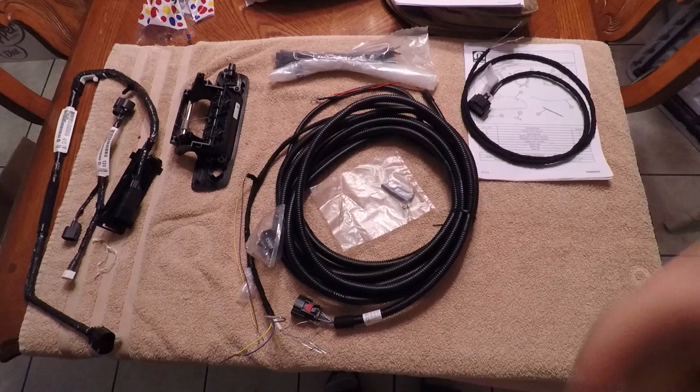So, ladies and gentlemen, what do I have for you today? Well, today we're going to attempt to install the OEM backup camera on my wife's 2014 Ram pickup truck. Back then they didn't come standard with them like they do after the feds changed the laws in '16, I think. Now everything is mandated to have one.

And I've never really needed it. I've backed into a few things, but nothing terrible. But what I have noticed on my big Dodge that I tow with now, the '17, is it is really nice when you have to back up to a trailer. And you've got that camera there. You can line it right up in one shot by yourself. You don't need help. You don't need to get out, in and out, in and out.

And especially now with this new ZF 8-speed where they redid the transmission programming where you can't back up or move forward with the bloody door open if you have your seatbelt off going slow. Stupid. But anyway, I digress.

So what do we have? This is the factory kit.

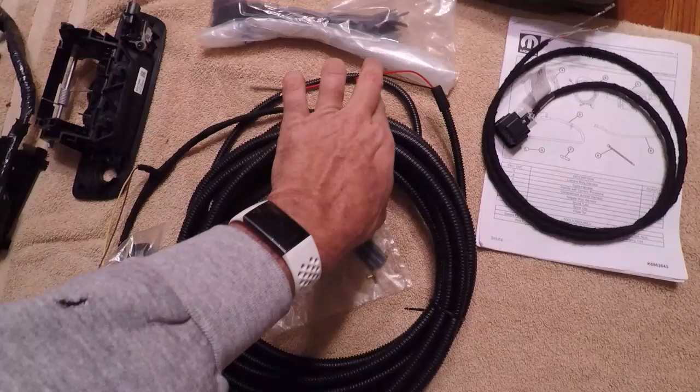Connects to a power wire underneath one of the main fuse boxes, which is going to require some soldering, which is what all this little stuff is for. That ought to be entertaining. Then this sneaks through the firewall. This gets connected into the body control module.

This connector gets assembled, which then connects to this connector, which then goes over to the back of the radio and connects to the video source, also in one of the Deutsch connectors, I guess, if these are actually considered Deutsch connectors and not Molex. I don't know. But this ought to be entertaining.

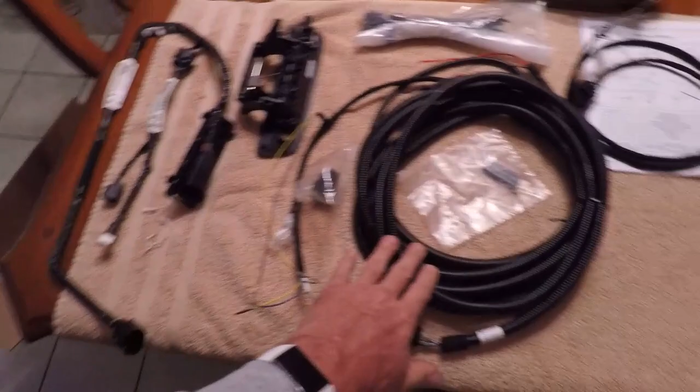Mechanically, getting the tailgate set up is going to be simple. That's a couple of bolts, nuts, screws, things like that. We'll run through that. That'll be pretty easy. Running this up to the front, that's probably not going to be that hard.

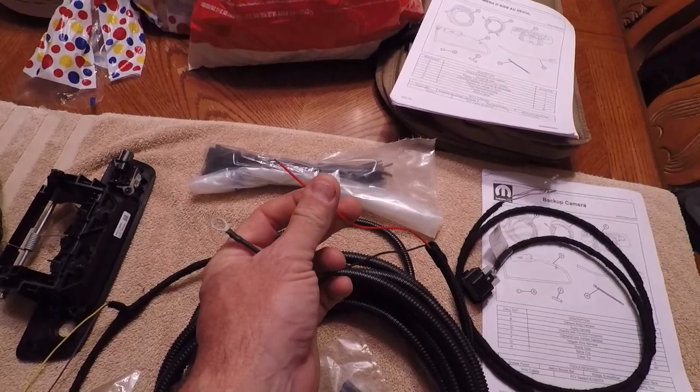When we get into the steps where we've got to partially strip a pink wire coming out of one of the fuse panels and then solder this to it without breaking that other wire, now we're getting into some higher level stuff that's kind of on the outside of my comfort level, but we're going to try it. And the rest of this stuff, not too hard.

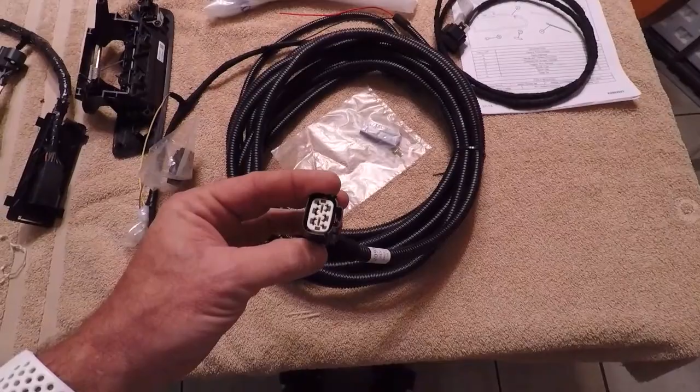The worst parts is generally trying to unpin some of these connectors, and there is a little bit of that we're going to have to do, and I'm going to show you how I believe they're supposed to come apart without breaking them. I think I may only have to do one of those. There's a couple others that talk about it in the instructions, which did come in English, French, and Spanish, so that's kind of nice.

There's a couple other connectors that could possibly have to be de-pinned before I can put new pins in them, but given that this truck is fairly old and was never optioned with this or anything else, I don't know that it's necessarily going to need that to be done. So that's what we're going to do today. First thing we're going to do is move this junk outside and start taking the tailgate apart.

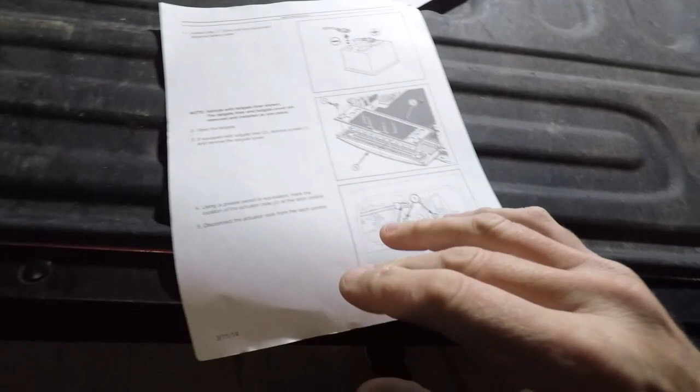Alright, well, supposedly we don't need too many tools other than metric sockets, a Phillips screwdriver, trim stick, wire cutters, RTV sealant, and the crimping tool, which of course I don't have, but we'll make do. One of the first things you need to do in ye olde instructions, it says take the negative battery cable off. We'll do that in a bit.

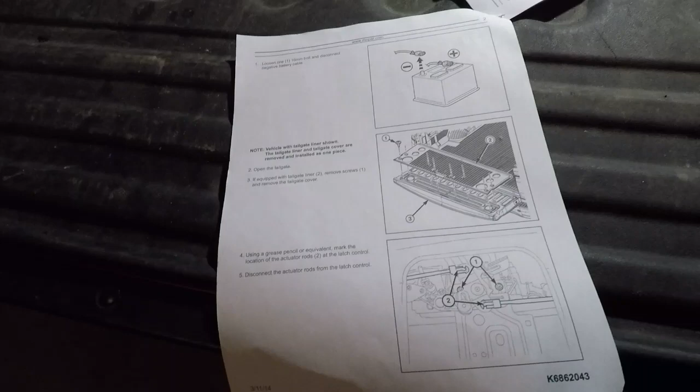But we've got to get to the inside of the tailgate. Underneath this bedliner, or tailgate protector, which for this truck I put a WeatherTech on it, so that's what this is. Yours may differ. Is a panel along the whole top of here where all the wires and connections and things live for the new, well, and existing latch.

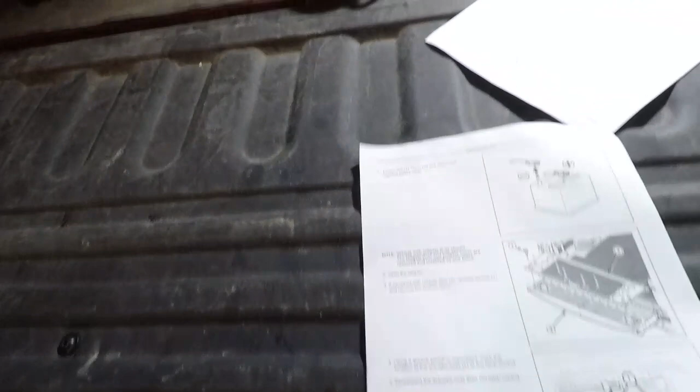So that's the first thing we're going to do. I'm not going to show some of these steps, which are going to be pretty obvious. The tailgate protector on this one comes off. You've got some screws here and a little bit of Velcro up front, and then that'll pop off, and then there's some more screws here, here, here, and here, and then that panel comes up. So that's where we're going to start. That's what we're going to do, and then we're going to start the action inside the tailgate.

Okay, once you pull all of the screws off, then this panel should just move out of the way. And it does. And I don't know why these grommets stuck on that one. I guess just because they felt like it. All the rest of them came off, so don't lose those if they do stick.

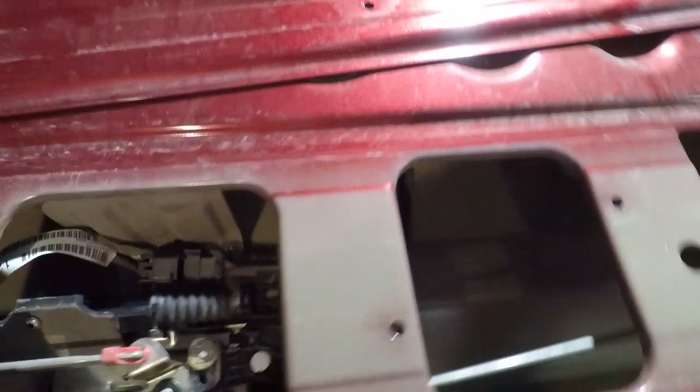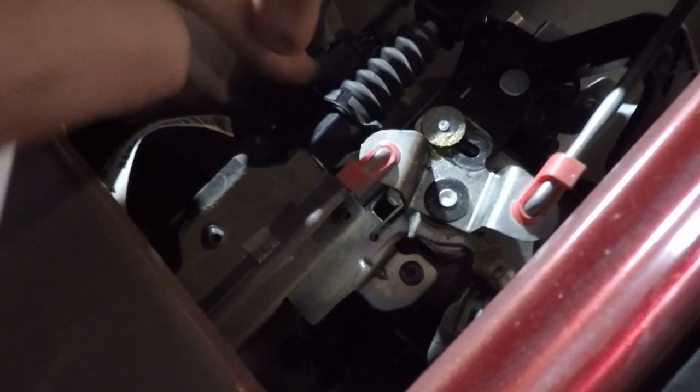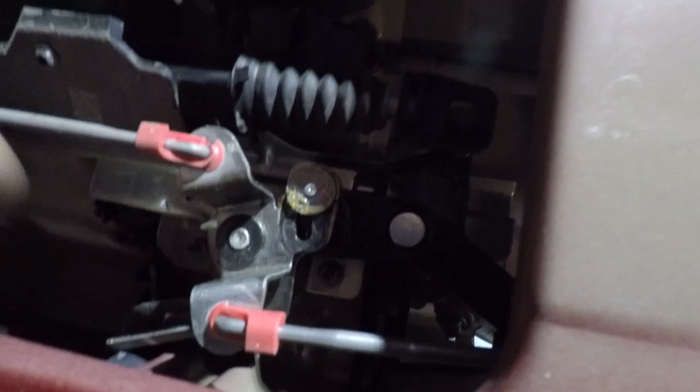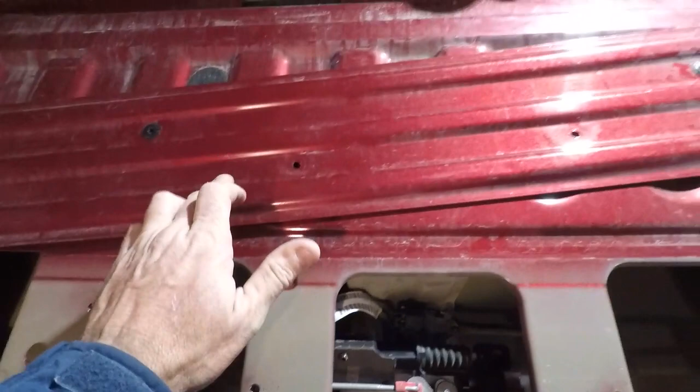So now we're getting into the nitty-gritty here of what we've got going on. You've got some of the harnesses you're going to have to change. See the similar bends. And this harness that's going to go in there on the new latch. Apparently the mechanism isn't going to move. Now, that's interesting. So that's a good thing, I guess. All that mechanism is going to kind of stay where it's supposed to be. So we are going to set this aside and get set up and see what we can do.

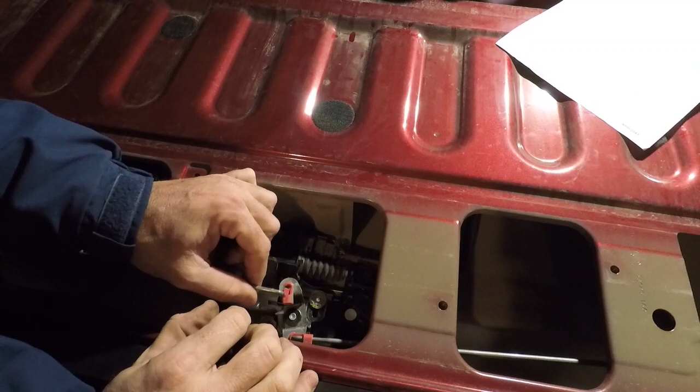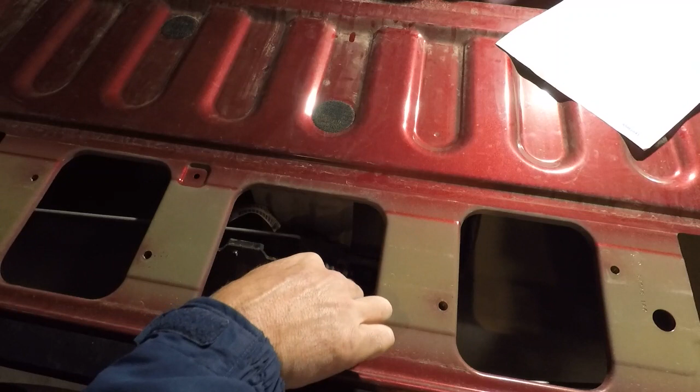Okay, so the first thing it says to do is mark these control rods and then disconnect them. Well, I've got this on video, so I'm not going to mark them, but I guess it's because you want the driver's side on the bottom and the passenger side on the top. These connectors are pretty common in this kind of thing. You usually just have to spin that out of the way, and then it disconnects. Same thing over here, spin it out of the way, and it pops off. And now these shouldn't come out. You should just leave them, because obviously that's going to go back in.

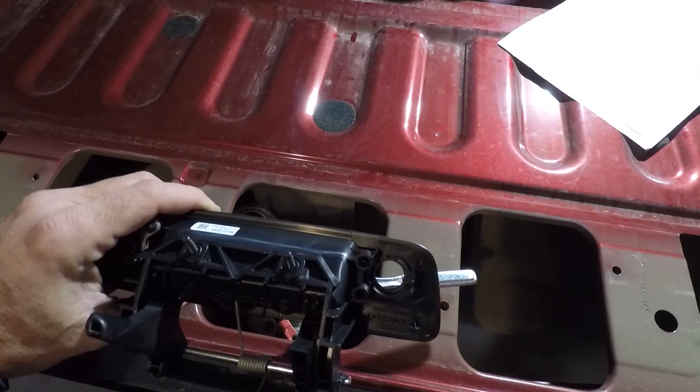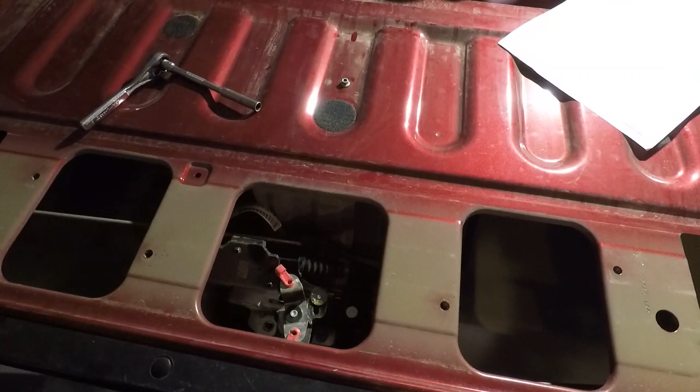So the next step is going to be getting down in here, and there's a couple of small, look to be maybe 8mm nuts we're going to have to take off, which is going to let the whole thing completely fall apart. So I'm going to go get a little wrench and see what we can do. So what you've got is this old one is in here underneath from the back like this. Got these two studs here, and they are little 8mm nuts that are on them. And because of my big fat hands, not the easiest things in the world to get a hold of. Found it.

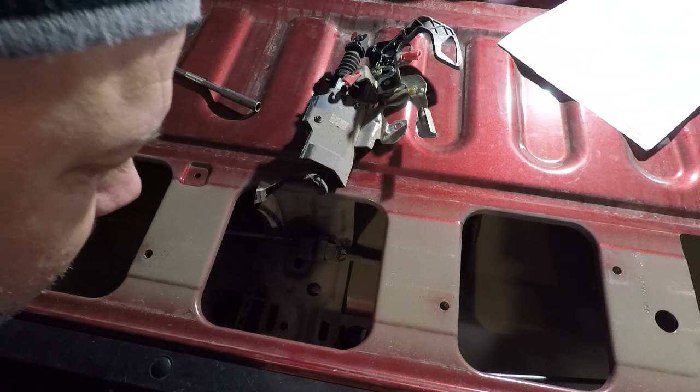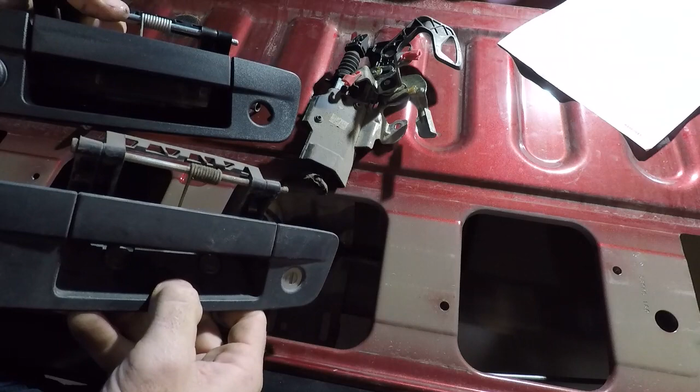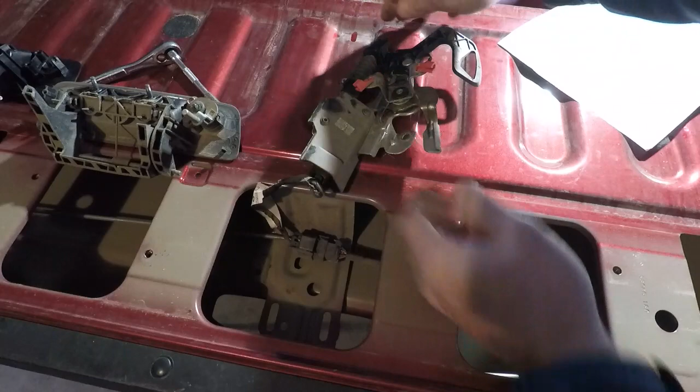And the next step is to remove this, and there it goes. So now we have the old one out and the new one about ready to start the reassembly. There really isn't much to this. All that does, when you pull up on the handle, this lever pushes on this lever, pulls those two rods that we disconnected, and unhooks the sides. So that's it. So now we're going to figure out what the next step is.

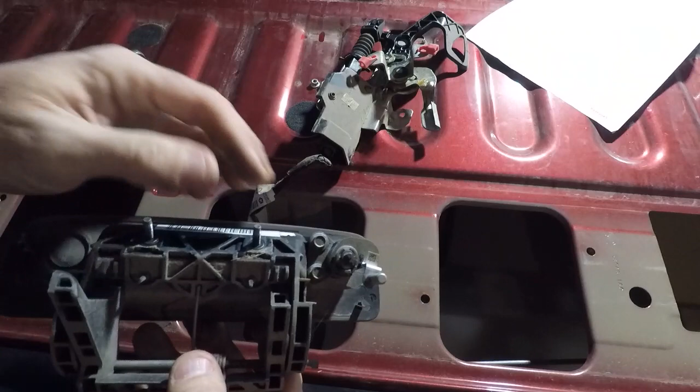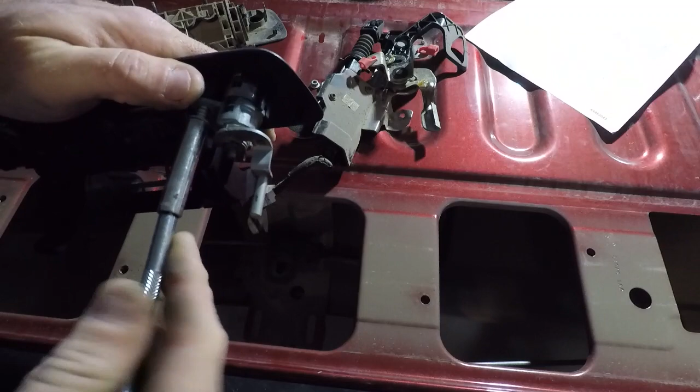So the next step is to transfer the lock cylinder over to the new unit, which is also 8mm. Interesting. The screws are self-tappers, so there are no threads in these holes to start, which is, I guess, to be expected. It's just a casting. And you want to be careful not to over tighten them, I would guess. Snap.

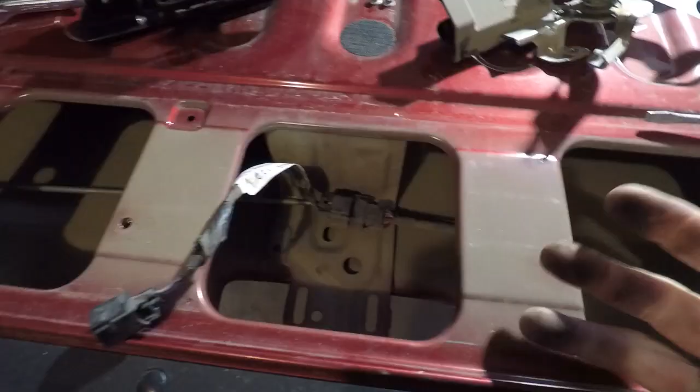Lock cylinder is transferred, and we got our new unit with the camera. So we're basically done with this. So it's at this point that the actual instructions skip a couple of steps. We have a new connector for here, and an entirely new harness that starts here and goes down to in here, comes out over there. You can see it actually has the same clips on it.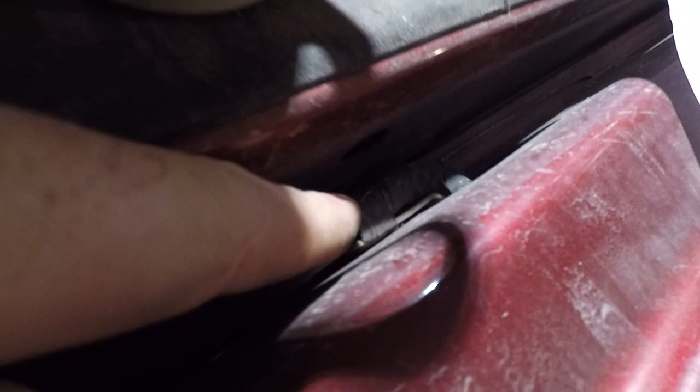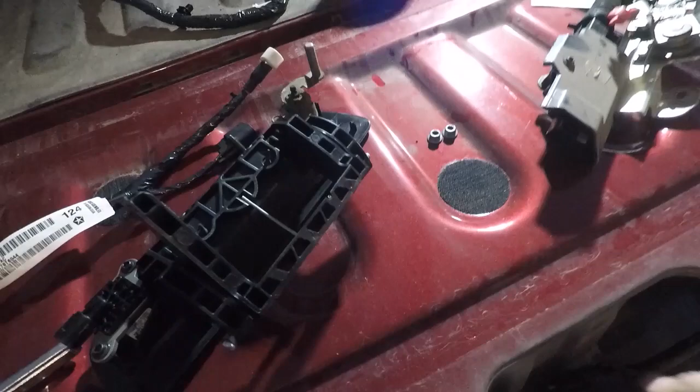And so this is underneath this. So if we don't go in there right now and kind of get that out of the way and get everything plugged in, then it's going to get difficult to make this work. So I'm going to go get my trim sticks with a Christmas tree remover and see if we can get this out of here without bending anything. It goes, but that's not what I wanted to do. That's okay.

Done. So that part of the harness is disconnected. Let's see if it's... And it is loose all the way down to the back side over there. So that's good. The next one is going to be... see if we can pry this out of here. Nope. There it goes. Got that one disconnected. Got another one here.

This one's interesting because this wire has been pinched in the gap for the tailgate for a long time, and I don't know that that's supposed to be like that, but all these connectors are now loose. So now we need to pop this one. I'm sure this one's big. There's a little tab you have to push to be able to pull this one out, and then there, it's free.

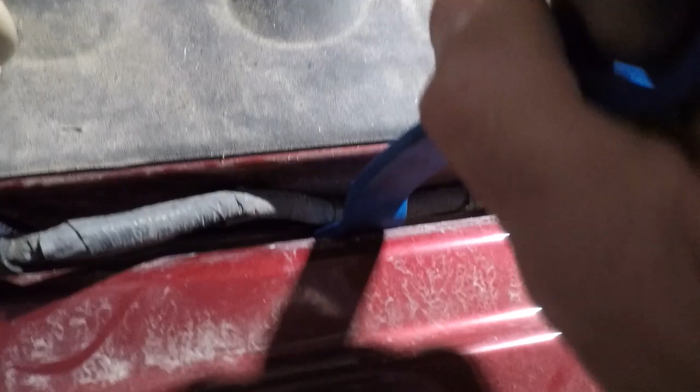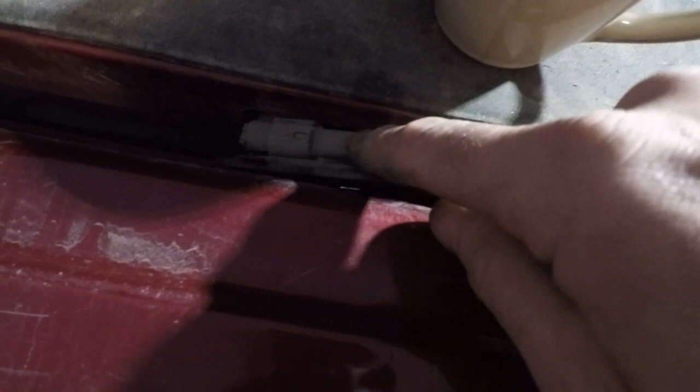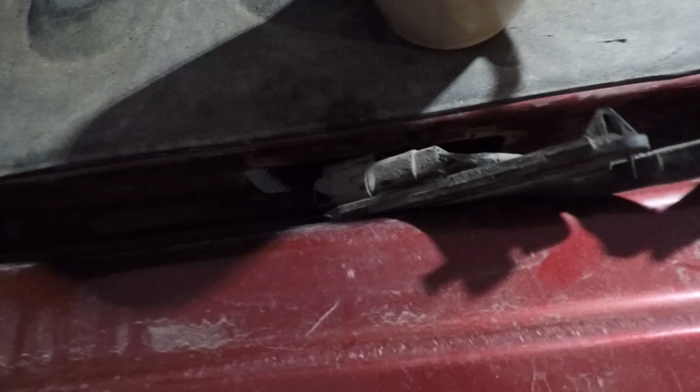So now what we're going to have to do is disconnect the body harness from this truck from this, so then we can get it out. As you can see, that piece is here on the new harness. Can't quite tell how to get that. So we're going to take a better look at it and see what we can do.

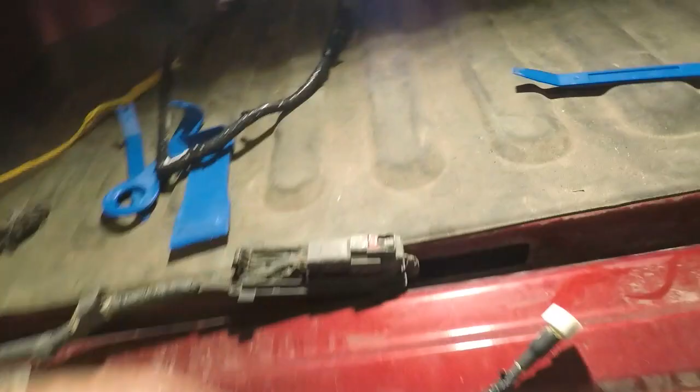And once you pull the whole harness out, it is a fairly standard double lock connector. So you got to move the red one up, and then you should be able to pinch it and pull it off, just like that. And now your old harness is done. Now here comes part of the fun part of this kit.

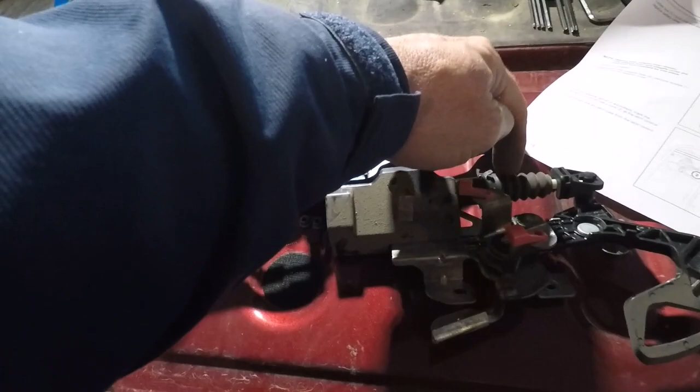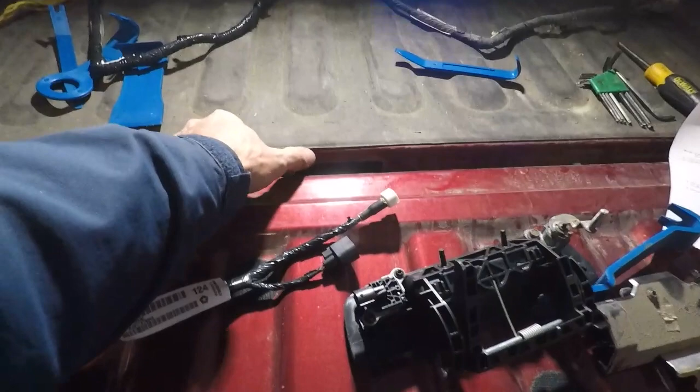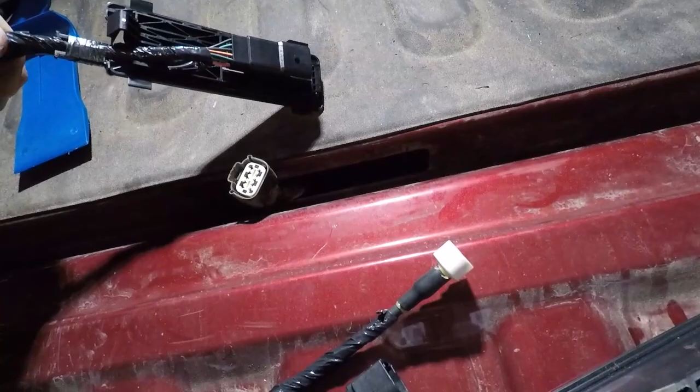So these two wires are related to the power tailgate lock. They run this solenoid. And those are not in the new body harness on this kit. So you actually end up having to pull these two pins out of this connector and repin them into one of the other connectors, so that when you plug the body harness with all of the camera stuff in it into this plug, you transfer over these wires from the car right now that actually run the power tailgate lock.

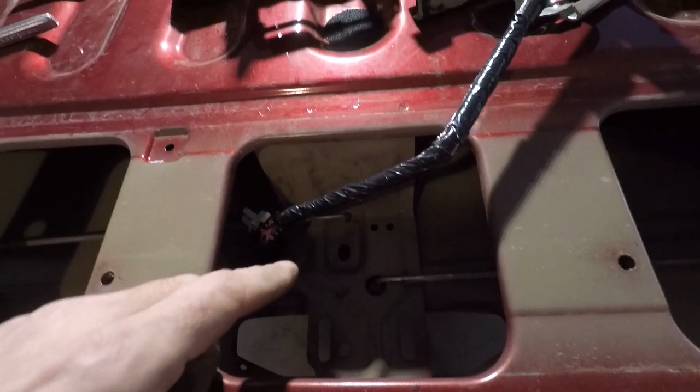So I think I know how to get those out without damaging them, but we're going to try in a little bit. The next step is to basically put the tailgate back together, drop the new wiring harness in, get everything plugged in, hooked up. Notice it has both of those connectors that go into the tailgate. And then we're going to get this all the way over to here, attach the new wire to that, put these two things back in, and then plug everything back in.

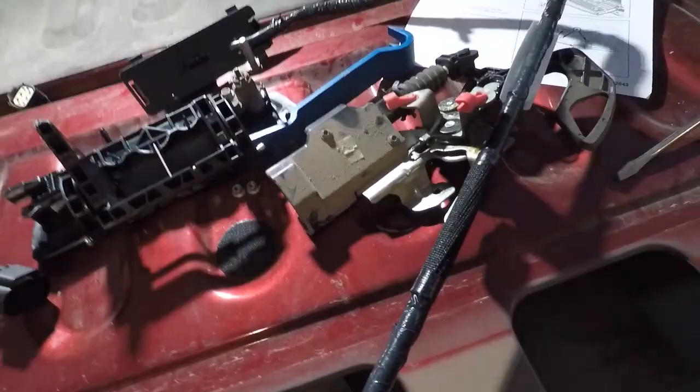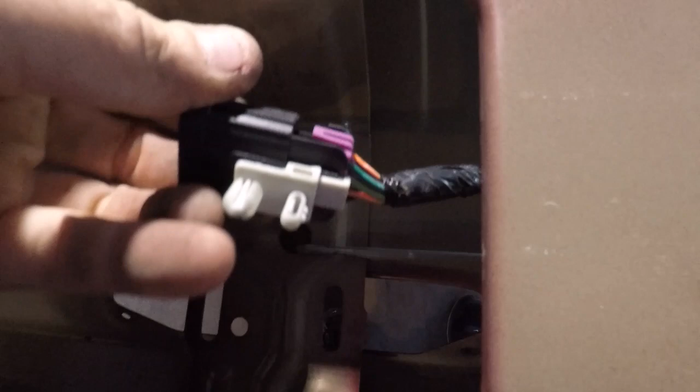So we're going to put the harness in first. The harness came out from the bottom, so I'm going to try to put it back in from the bottom as well. So this is the path that the harness has to take. It's not too bad to pull it in there. It takes a little bit of fiddling, but then you end up with, over here, this connector goes right there.

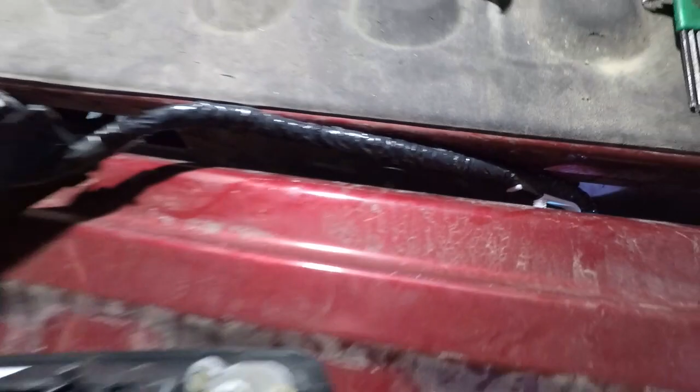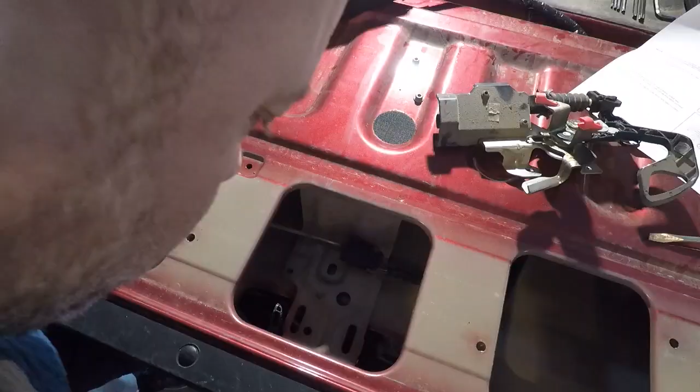Now I have not hooked up the outside connectors yet, which will finish holding this in place, because I want to make sure I have plenty of room when I have to unpin this connector and do everything else. So I'm not going to try to put all this in yet. I'm just going to let it flop for now. So now we're going to reassemble the new camera latch and the lock mechanism. There she goes.

As you can see, the way that goes in there, it kind of covers up. It doesn't cover up that connector too bad, so still not too bad. And make sure that your rods are not blocked by anything, because they have to go back on. So once you get that, then these go back in the same way they came out.

Okay, that works. The lock mechanism is lined up. Now we need to hook in the wires. And they come in from this side a little bit. A little bit easier to get this one if that rod is disconnected. It's also rather hard to see the orientation that this needs to be in. Oh, let me show you something there.

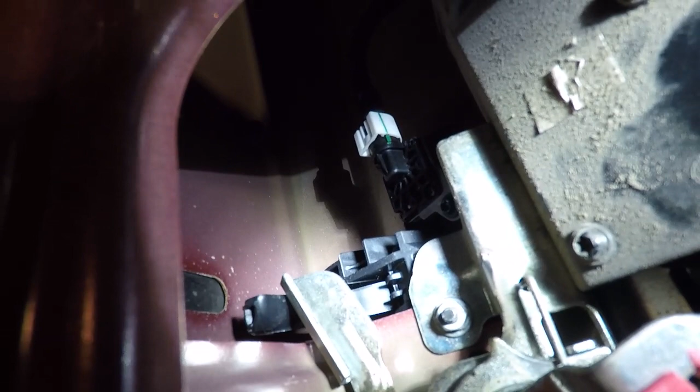You can see the little green lines? Those lined up, and that's the orientation it's supposed to be in. I didn't realize they were set up like that, so that's kind of cool. Just a quick little note on the camera plug.

And now the other one. Reseat this. And the easy part is done. Now we have a camera. We still have our lock. Everything is where it's supposed to be, held down as it's intended to be.

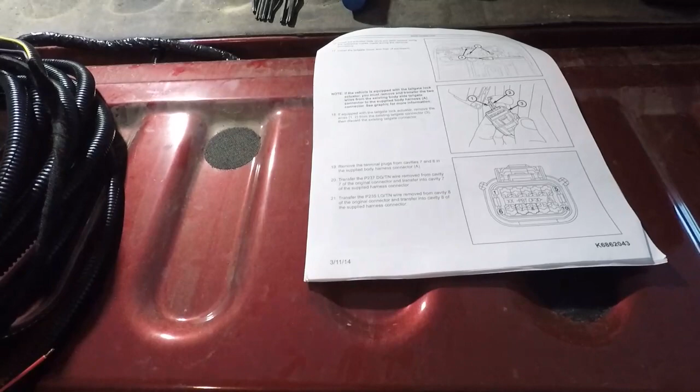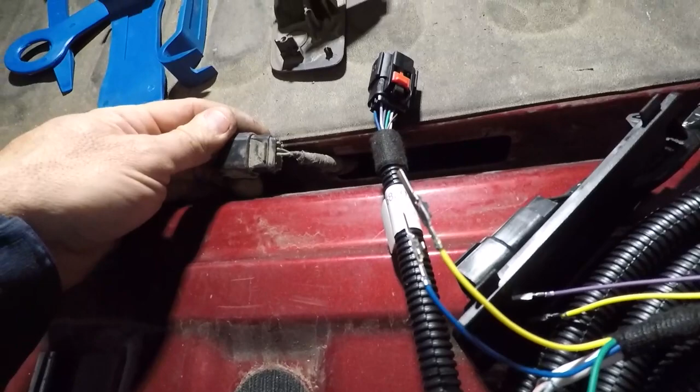So what we can do now, put this cover back on and start working on the next steps, which is where the wiring part comes in. So that's going to be fun. The next part of this is where we have to, since I have the tailgate lock and these two wires in this connector, just like that, where we need to depin this connector and reinstall those wires in here correctly.

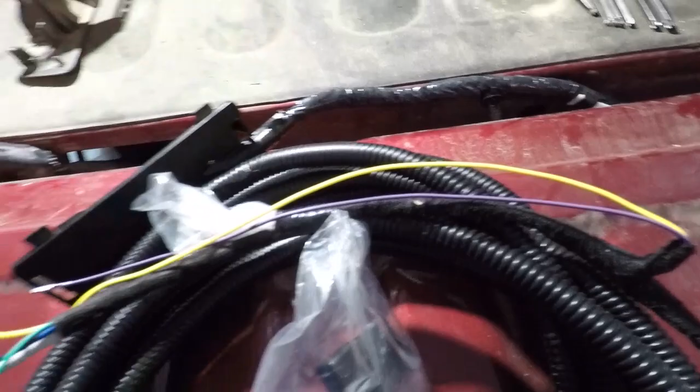But there are 4 empty spots, as you can see. Those 2 little white plugs, and I've already pulled out 2 of the other white plugs. But I've never really done automotive electronics, so telling me that 1, 2, 3, 4, 5, 6, 7, 8, 9, 10, am I looking at it this way or this way?

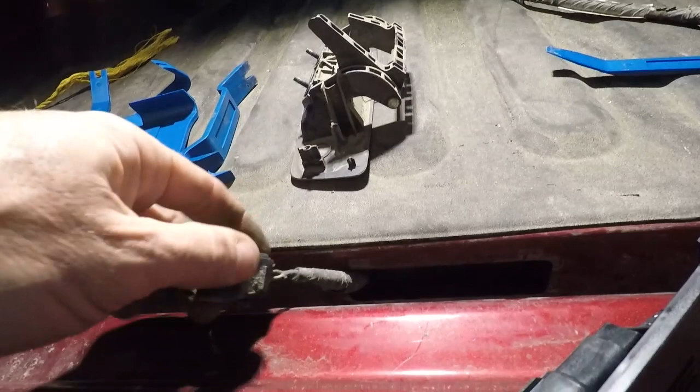What I figured is, I guess that the 2 pins on this connector should be in the same place as on this connector. Put them in the same orientation. Yeah, there we go. So the green one goes near the blue, and then that other one goes next to it, and those other 2 plugs stay in like I have them.

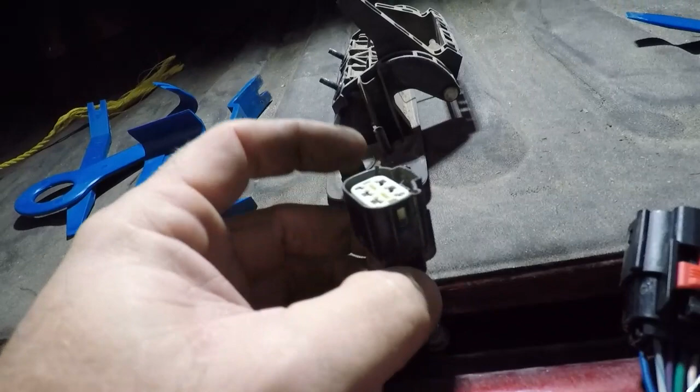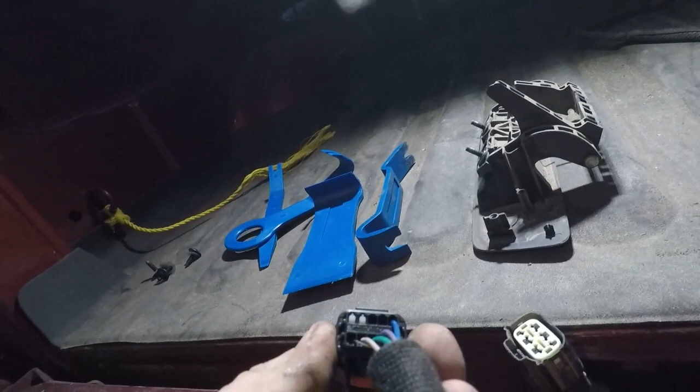So what I believe we have to do to get these apart is, I think this white retainer has to get popped out the front, and then there should be little, very small pry pieces that we can pop to disconnect the 2 wires, and then they should just slide back in the same orientation into this new one. So I'm gonna go get a couple of very small screwdrivers and see what we can do here.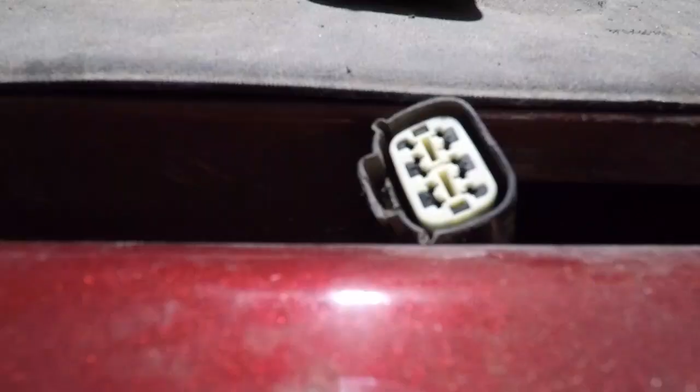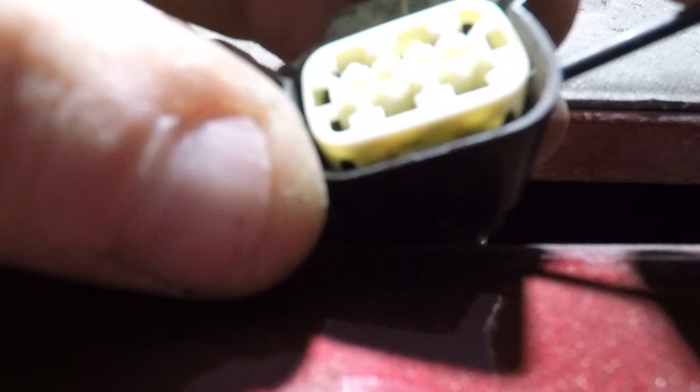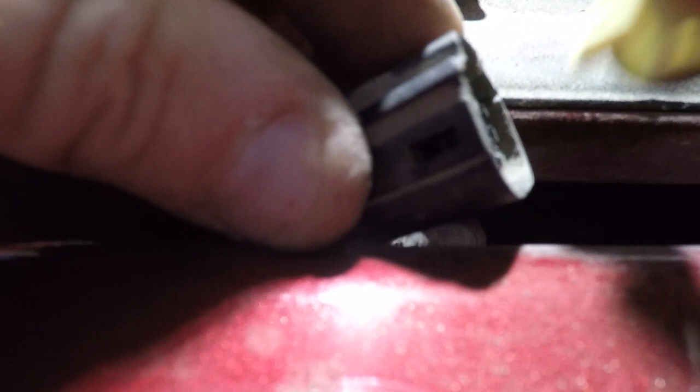I'm not sure how terribly well this is gonna show up, but that white piece has to come out. And then you've got 2 of the connectors in there. And right now I gotta go get my glasses because I can't see what I'm doing.

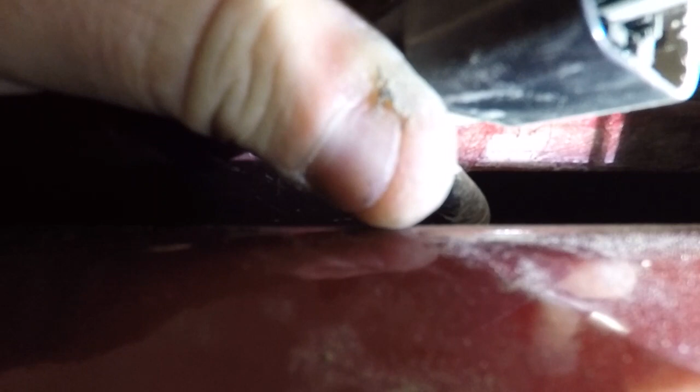And I think what we've got is, if you go down the top of these connectors, yep, there's a little tiny clip that you can pry up, and then after you get that clip unhooked, you can see I've got one where it'll move. And then they will come out.

Whew. I don't know if that's even focusing, but down in there you can see those little tiny black clips. And if you pop those up, then those connectors can come out. And so those 2 went in like that. And now, if I am good, I can take this connector and just put them back in.

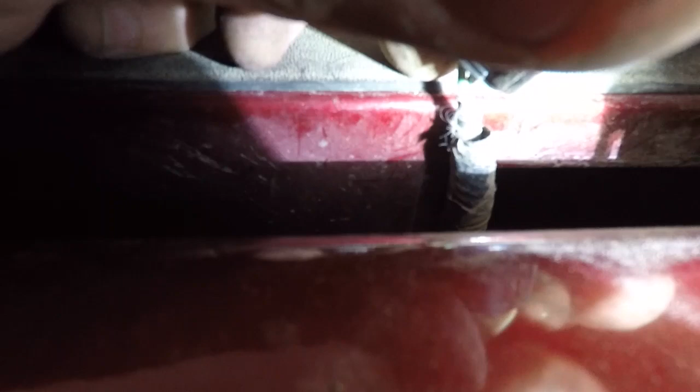Now I may need to pop this thing out of here so I can see what I'm doing. At the distance. Okay, now there's 1, there's 2, they're in. And now we should be able to just put this hopefully right back where it came from. And that connector is repinned.

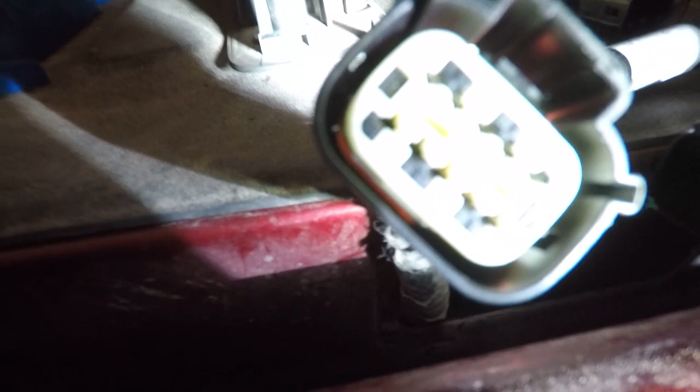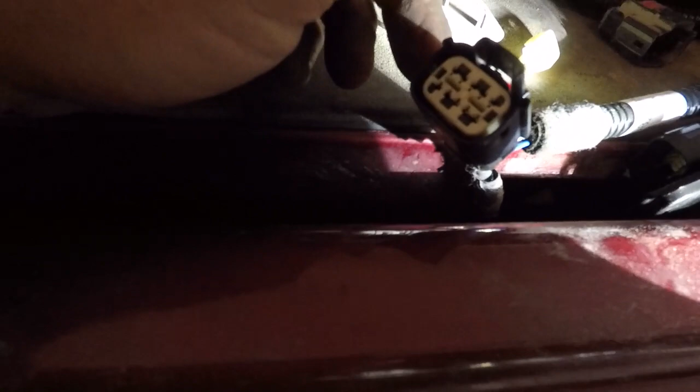So of course, it would have made a hell of a lot more sense if I had done that from the bottom. So now I need to run that wire, which I don't think is going to be a big deal because it's a pretty big hole down there, but I need to run all of that wire down through this hole.

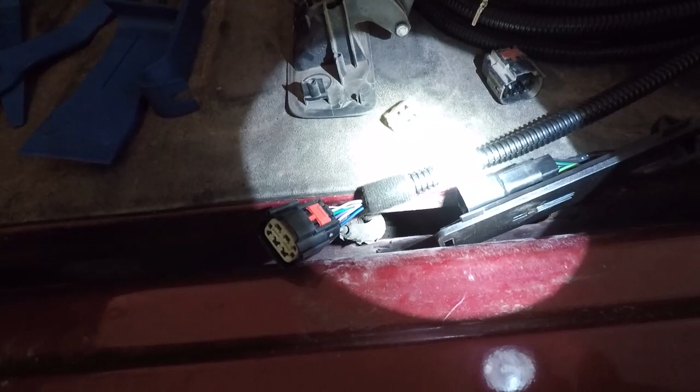But anyway, so that's how you repin one of these connectors. It's kind of a faff, but it's required for this, and you really don't want to cut and splice and do all that other stuff because there's no other wires in this new connector. So that is the beginning of the fun part. Now what I'm going to do is cut my tie wrap, run all this cable down through here, probably drop the spare tire to open up a little room, and then we're going to start running this cable up to the front.

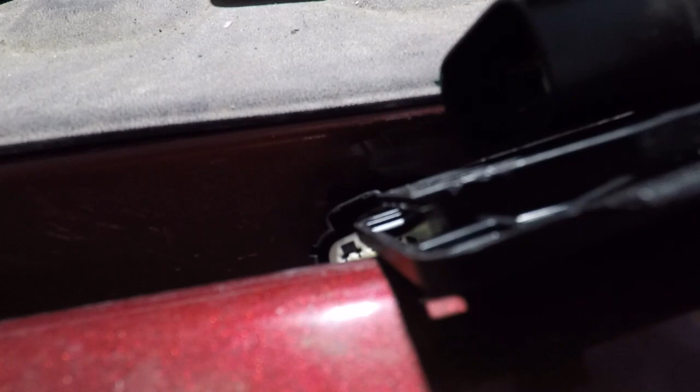Okay, so once you unscrew that, you can then take the piece that came out of the trunk, reconnect it, set that double lock, and refit this piece like so. Make sure your clips are where they need to be. And the rear is done.